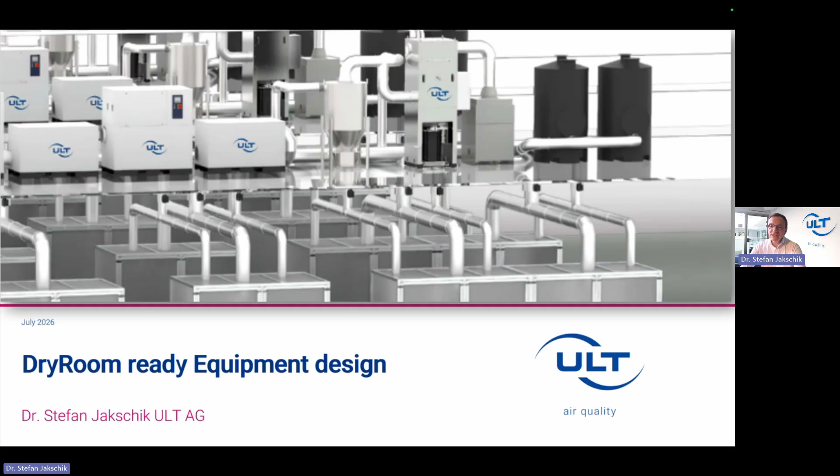You mentioned especially that learning in a scaled-up production and a big volume production is essential for innovations and for further development. So this talk focuses on air, on the environment in battery production, and it also shows how these learning effects should be applied there.

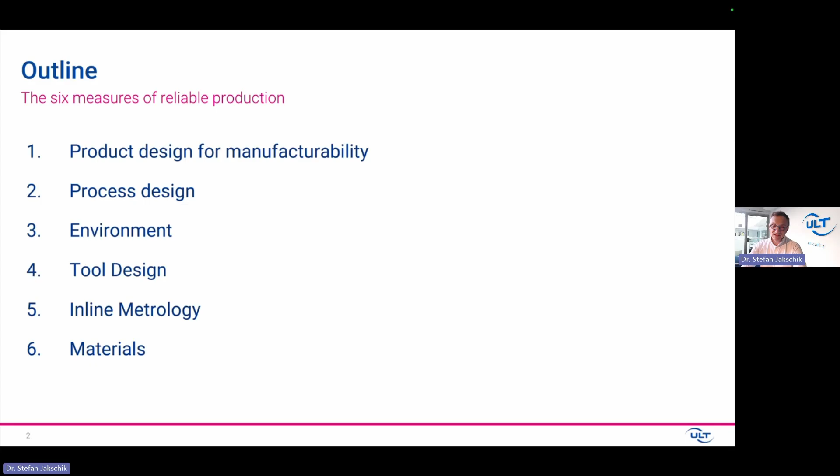We identified 6 measures of a reliable production from our point of view, from environment and air. First thing is product design for manufacturability. Second is process design, then the environment where you do the process, the tool design, some inline metrology topics, and material topics. And at the very end, I will also tell you what makes it the Magnificent 7. But let's walk through these topics first.

Before we start, I'd like to explain what drives us at ULT in the market and in the economy. First, we are focusing on employees' health. If the air is clean, everybody stays healthy. If not, you have the risk of losing work time, workforce. You have long-term effects on health and definitely also on motivation.

Second, you also want to focus on reliable machine operation. If there's too much dust and particles flying around, machines get deteriorated, and you have very high maintenance costs, downtimes, and also rework to be done. And third, also extremely important in battery production, is product quality. Product quality in many processes depends strongly on air and particle-free production.

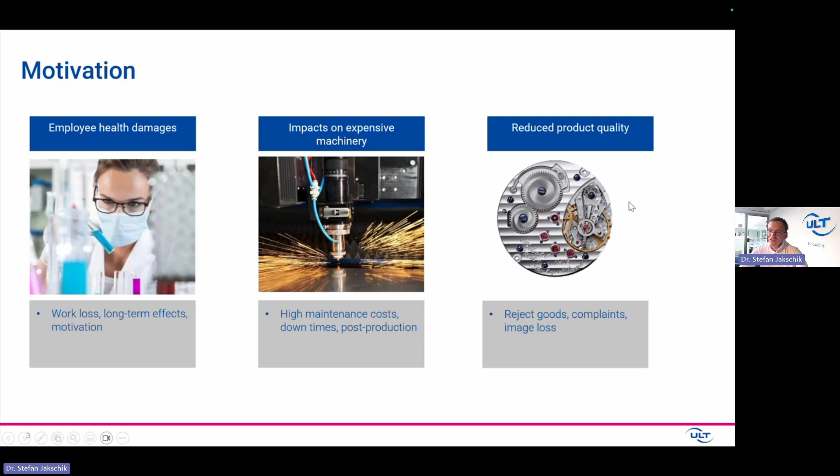I think such a watch production is very intuitive for every one of us, but this is true for many processes. I'm sorry for showing you these very bold pictures here in the beginning with some German words on them, but these are examples of burnt down cars because of particles or moisture in the production processes. This is what Benedict also mentioned in the beginning, that battery production seems to always be a bit too late if you recognize things in the battery, and this is also true for reliability.

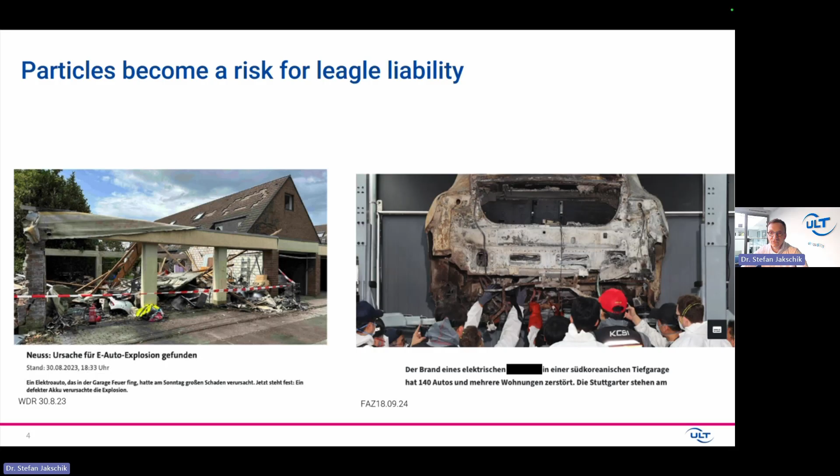If there is a particle during the production process available, sooner or later this very particle could be the cause of a battery short, which leads to thermal runaway and failures like this. I think this makes it so important to learn how to run a reliable production, also in terms of clean air and clean production processes. So this is the motivation for this kind of work we do in this market.

And as promised, first I want to talk about product design.

I see there are many people listening today who have much more experience than me on product design, but I look at it in terms of particles. How do particles impact product design?

These are the three major ways you can make a battery cell: you can make a pouch cell, a prismatic cell, or a cylindrical cell.

Since the pouch cell has a lot of operational steps involved, the risk of particles is highest in pouch cell production. But it's less critical because a pouch cell is not stiff and hard. It can move a little bit, so particles don't necessarily short the cell because it can modify its shape slightly.

The other two, the prismatic and cylindrical cells, are very stiff. They cannot move; all the material is pressed in. So here particles are much more critical.

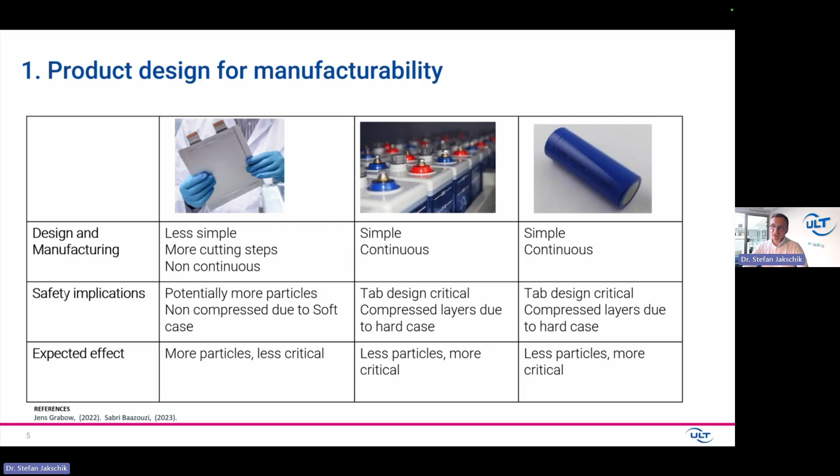The good news is, since the production is less complex than a pouch cell, there are also fewer particles available there, especially for the cylindrical cell, which may have the best process control of that kind of production.

So what are the sources of particles in a battery cell production process? If you walk through it from the very beginning, you start with dosing, then coating, drying, calendering, slitting, drying—all these production steps. I showed you what kind of materials are exposed there and could deteriorate the cell.

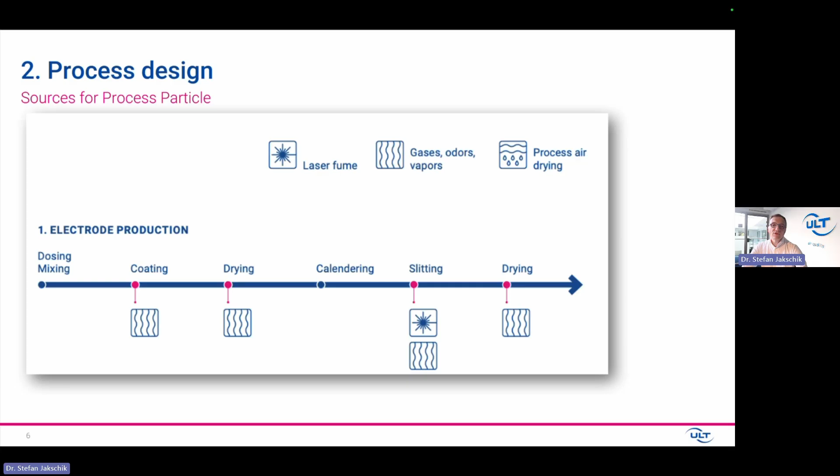In the coating, drying, slitting, and other drying processes, there are gases available—odors and vapors—which could modify the cell. Slitting is in some cases done by laser, and the laser produces very small particles. I have some pictures of these later on, particles which need to be taken care of during production.

Moving on to separation, stacking, packing, and filling, you have the same kind of critical steps. Separating is nowadays done by a knife or laser. Especially laser produces very fine particles, and you have to be aware of moisture in these steps.

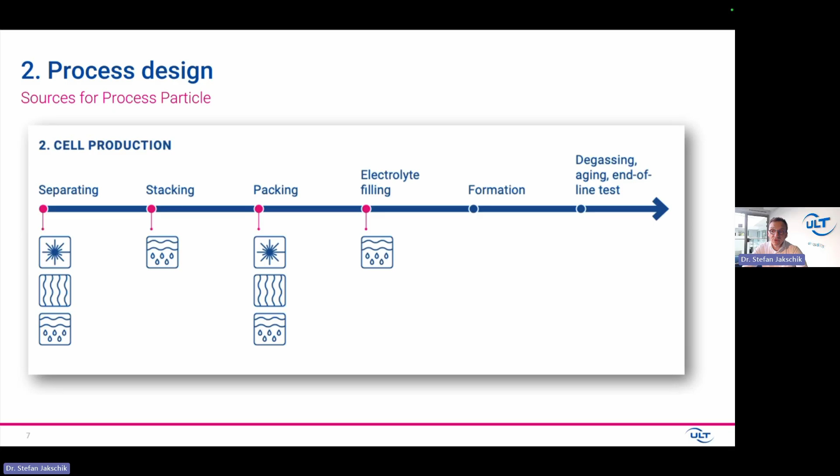The closer you get to electrolyte filling, the more important moisture becomes in the production process. From our point of view, water or humidity is also a critical particle or critical gas in the air which needs to be removed for battery production.

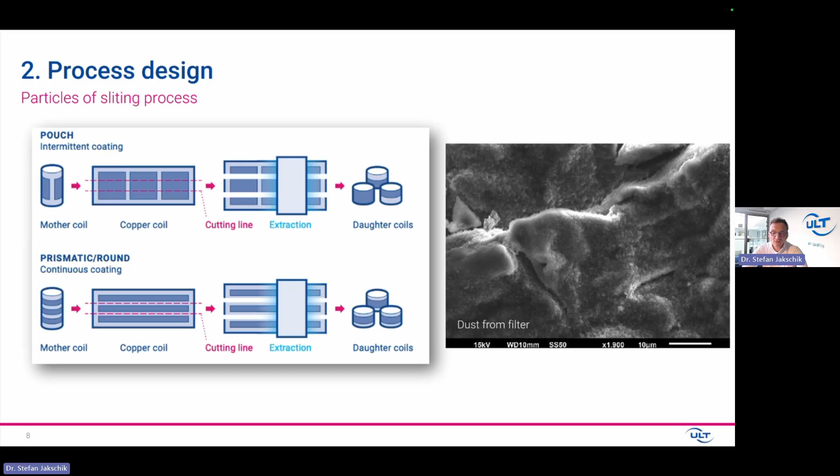This laser process we just looked at takes place like this—very often you have scanner processes running over the electrode. When we look at the particles, you see something like this, especially when you work with a short pulse laser.

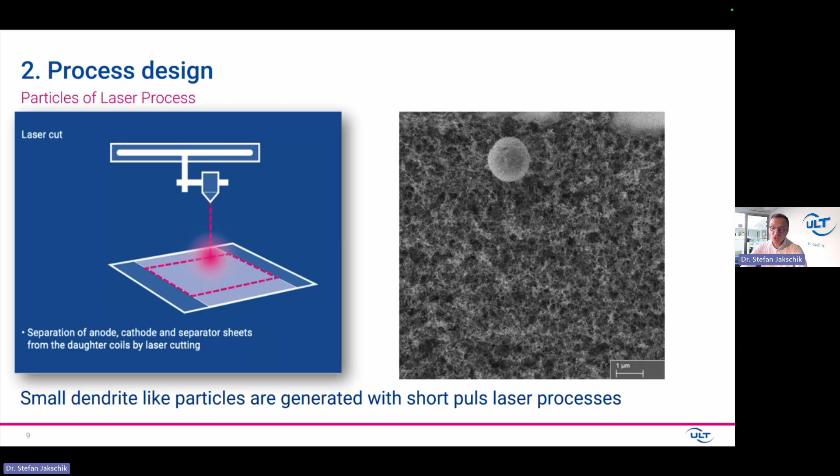You have some balls, but mainly it's kind of woven, very dendrite-like particles, as you see here. For those of you aware of batteries, dendrites are often lithium dendrites, but these are dendrite-like particles from the laser slitting process, which could be on the electrode surface after this production process.

Further on, when you put everything together in the pouch, you have a tab welding process. In my experience, this is the most underestimated process because very often it's done by ultrasonic welding or laser welding, and many people don't see the particles—I often hear from the market that there are no particles at that step. This is not true.

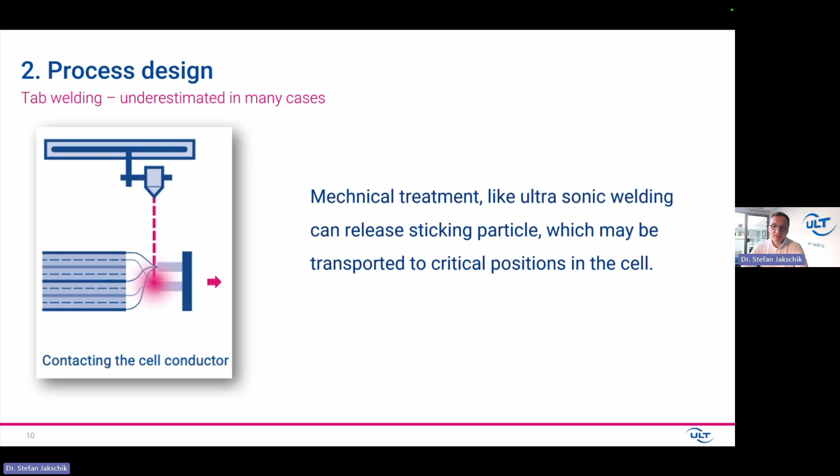When we do a particle analysis here, we also see a lot of particles—especially since you also move particles from previous production steps and bring them to very critical positions in the stack or in the cell.

I want to walk you a little deeper into the kind of particles that can be exposed during laser processing—this is a test we made in one of our labs. You have a laser production on an electrode surface, and we investigated lithium titanate and LFP, which is nowadays the common electrode, and you see the kind of particles we observed there.

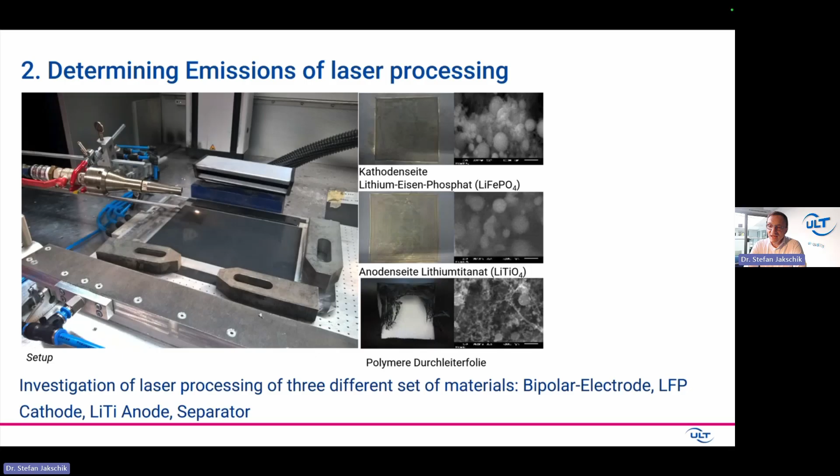A lot of balls, dendrite-like particles. Most of them have a size of 100 nanometers or below—barely visible, definitely not by eyes, and also not recognizable by many sensors and vision techniques. So very good capturing of the particles is extremely important on that side.

Before we come to the capturing, which is machine design, I want to talk about the environment where the production takes place at all. And this is the dry room. All these critical production steps, as I mentioned, close to electrolyte filling, are done in the dry room. And since there is no moisture available, many materials act in a different way.

So you definitely have material degradation. Some degradation takes place because chemical reactions are made possible since the protective moisture layer is missing. So materials wear faster than usual, and also the kind of friction and stress-induced degradation changes. So we also see kind of debris when moving materials over each other, or just by aging effects of this kind of material.

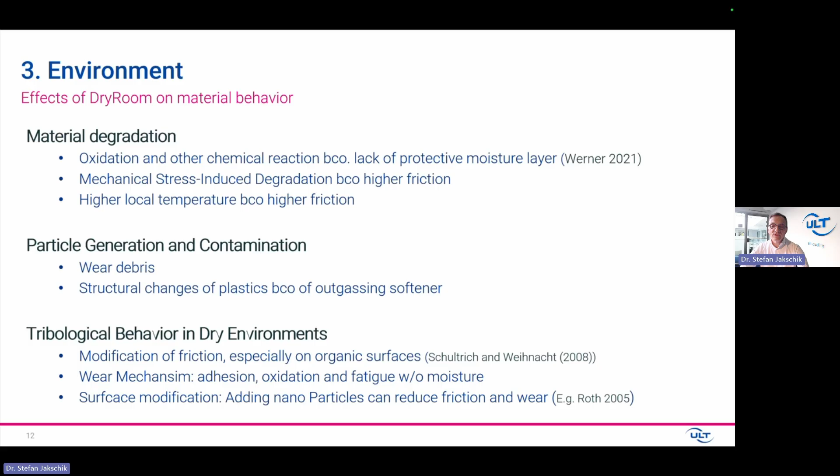A lot of investigations on that one, and also the bad news here is you have the bigger particles which you can see, but this kind of material degradation also produces small particles which are barely visible or detectable. So when selecting the material for a dry room, special attention needs to be taken on what kind of material you use in order to minimize these kind of effects.

So as promised, I'd like to come to the tool design. I mentioned already a few times that a lot of these particles have a very small size. On the left side, you see on the X scale the diameter of the particles, and on the Y scale you see the particle size, and on the X scale you see how long it takes for a particle to sediment.

And it takes very, very long for very small particles, for particles of 100 nanometers, to come to the surface. Essentially, you have them always in the air. A particle of 100 nanometers will stay 14 days, or 13 days here, without any interruption before it comes down to the surface. But in a machine, you always have turbulences, so these small particles are always in the air.

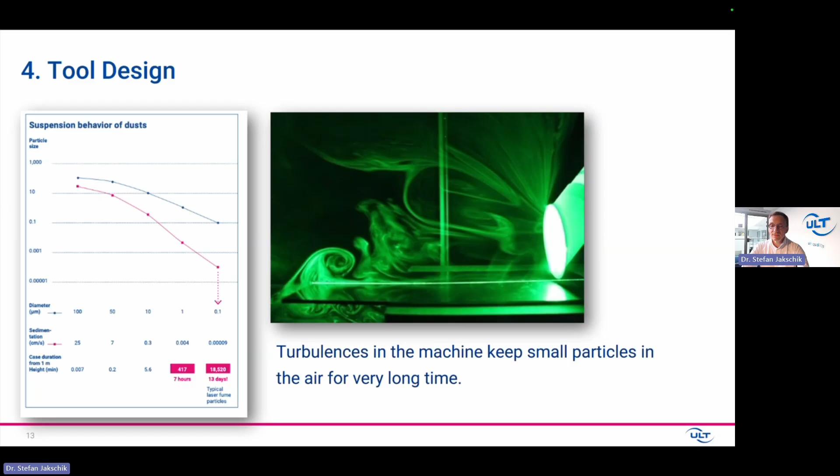So it is very important to suck them into a suction element as fast and as completely as possible. We made some visualization of this process, shown on the right side in green, where we put certain light into the air with a lot of particles in order to see how the particles are captured. But for the machine designers here in the room, I want to talk about two or three very important topics to be taken into account.

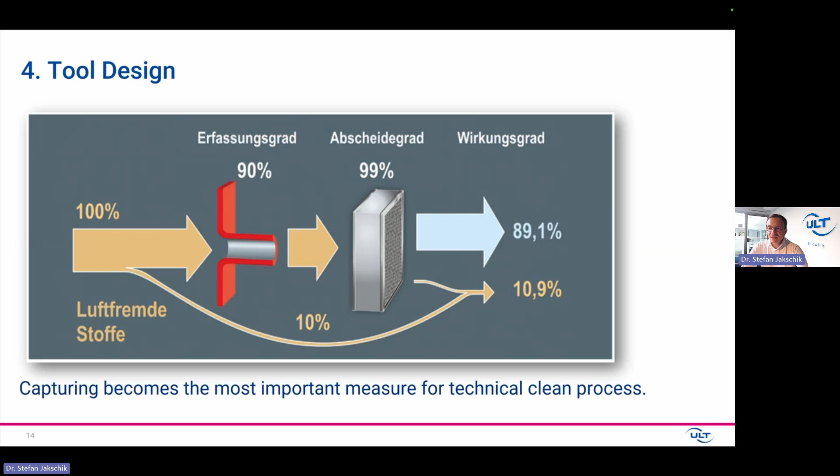The first is you have to make sure that you capture really everything, or nearly everything. So in this picture, you see if you have 100% of the particles and you just capture 90%, you still have more than 10% of particles in the air which could degrade the battery in future operation. And how to do this, how to make proper capturing, that's shown on that slide.

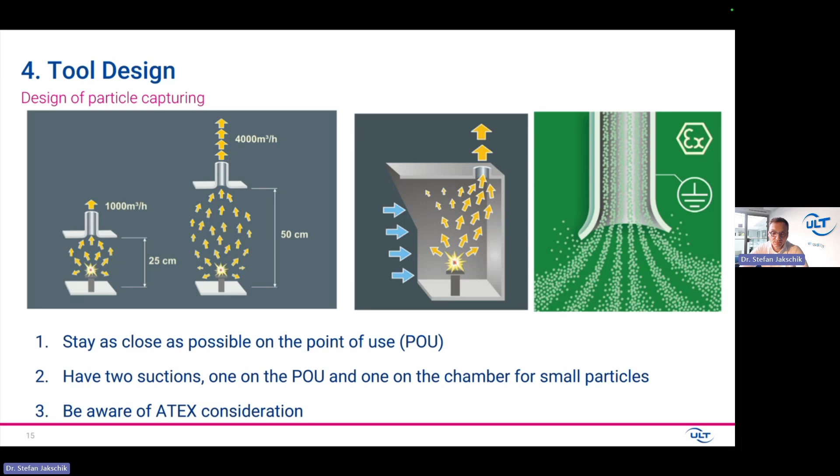So after we did everything we could do, after you have a proper clean room, a good tool design, and good suction, there's still the risk of having particles on the surface. So an inline metrology after these kinds of steps is strongly recommended. An early detection of these particles on your surface could reduce any scrap cost later on, or even reliability topics in the market.

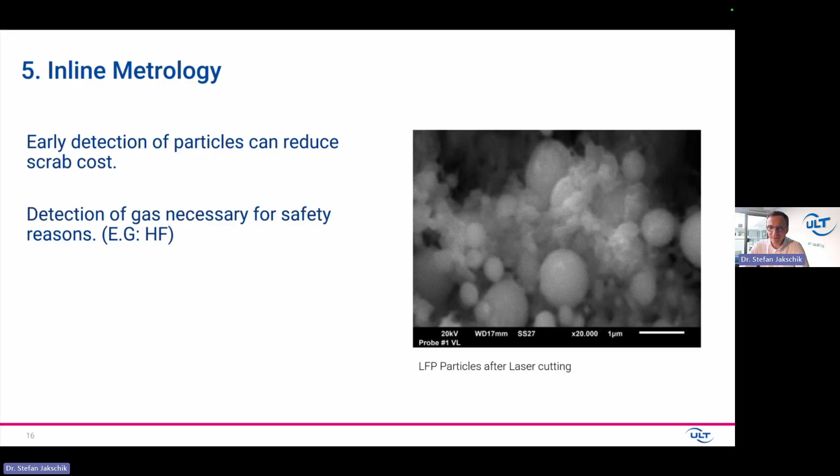In addition, we also strongly recommend detection of gases, because if a laser is operated on a typical LFP electrode, there is some risk that acids are produced like HF, especially if PTFE material is involved. This hydrofluoric acid could be produced. So in our installations we always work with HF detectors and HF filtration.

To make sure that no acid can deteriorate your battery cell, your equipment, or your employees in the worst case. So that's about inline metrology. And finally, I'd like to show you an installation, which is definitely not the biggest one we made, which you need for all of this kind of particles produced during battery cell manufacturing. You see on the right side a cyclone, which takes out the biggest particles, and then comes the filtration unit.

We have a filtration unit modified in a way that it also gets rid of the acids, of the hydrofluoric acid, and in some cases chlorine acid. After the filtration unit, most of the acid and particles is out of the game, and the two black bins on the left side are responsible for all the odors and additional gases in the production flow. So this is a typical industrial machining setup for that kind of process, when you want to make sure you have a perfect filtration where you work.

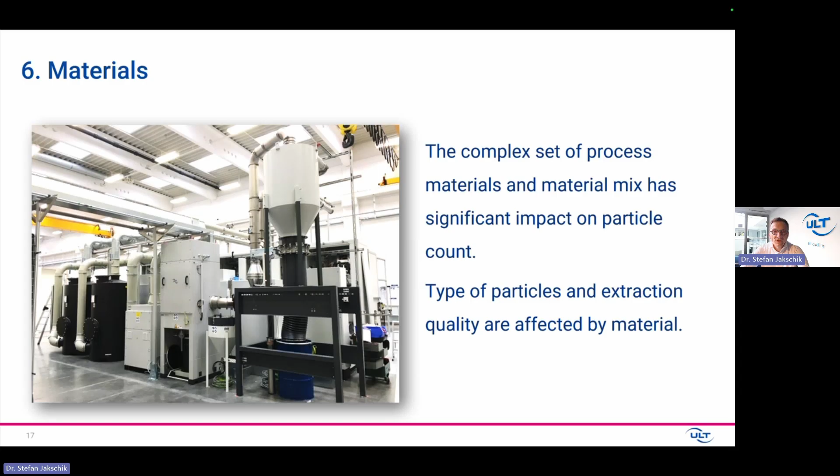With that, I'd like to come to the end. I promised to talk about these 6 levers that need to be taken into account. The first is design for manufacturability. When you think about your process, you should not just think about the specs, but also about how to minimize particle sources and how to design the product so particles don't play such a critical role.

Then comes process design - always think about what kind of steps you need. Some produce more particles, others less. And third, very important in battery manufacturing, is the environment. Clean and dry is a very simple answer there - clean and dry.

I did not talk too much about how to further improve the environment, and this is the picture on the right side which you see here. To our understanding, the most effective way of getting a very good environment is mini environments, where you have a certain housing around your machine or tool, and within that housing you supply the right amount of cleanliness and humidity, but also take care of all the particles produced during that production step.

This is something where ULT especially focuses, and where we have a lot of experience from the market. You see here an example of an installation where we brought everything together - the mini environment, the dehumidification, and all the filtration tools or necessities you need.

Your presentation was referring to the wet electrode production process. Do you see any differentiation in requirements for the dry electrode production process, DBE? So yeah, definitely I talked about the wet production process. You have different coating and you have the drying process to be done afterwards. Many other steps are very comparable. So also when you do a dry production, you have the slitting to be taken into account, and certain humidity and particle topics start earlier in the dry production process. So I would also already right after the calendering take care for good suction and filtration if there are some residual particles left over there.

Okay, thank you. Then we have another question. Are there any limitations for usage of, for example, EPDM or NBR in a dry room environment?

This is maybe a topic that not every one of you will come into contact with. But before I start going into detail on the process itself, I would like to introduce our company for those of you who do not know us.

Hosokawa Alpine is a very traditional company, more than 125 years old nowadays, and we work with approximately 800 employees here in Augsburg and up to 40 additional employees in Leingarten near Heilbronn.

We have two business units. The bigger one, accountable for about 60% of the annual turnover, is powder and particle processing, and I'm heading the R&D department for this business unit. The second business unit is the film extrusion equipment.

So in general, we are equipment manufacturer for all kinds of applications, and we've been part of the Hosokawa Micron Group since 1987.

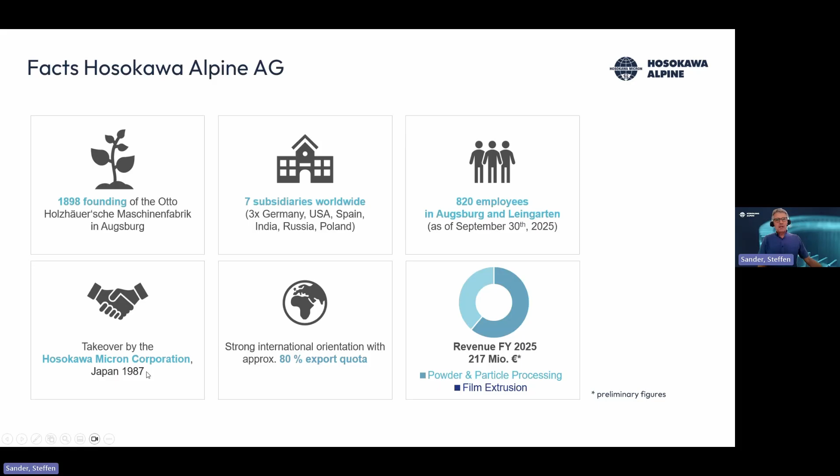The Hosokawa Micron Group itself is a very traditional company. There is still a Hosokawa family who owns most of the shares of the company, and as you can see, we have approximately 2,000 employees worldwide.

Of course, headquarters in Osaka, Japan, but there are some sister companies of ours, and of course our daughter companies spread around the world with a focus in Europe, but also North and South America.

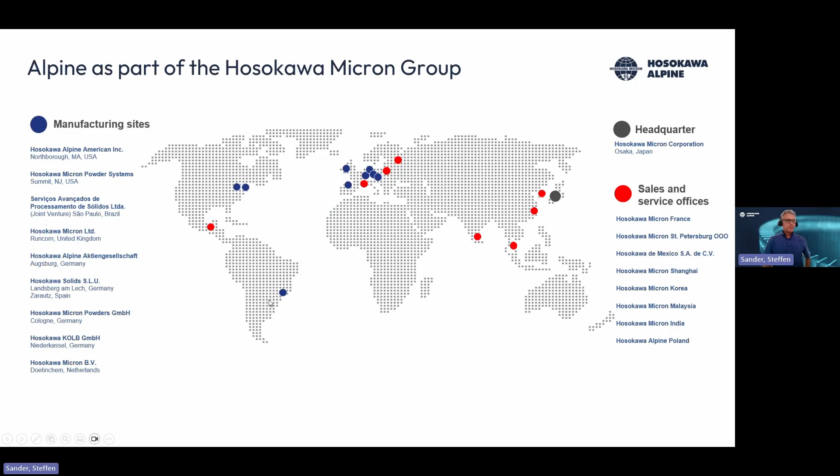We have several activities in the industry or industrial field around lithium-ion batteries, and if you see at this sketch, we are active in manufacturing equipment for our customers who produce mainly raw materials or cathode active materials if it comes to the cathode side.

For the anode side, we provide equipment for grinding and dedusting, but also shaping of graphite, fine grinding of silicon, for instance, and other anode materials.

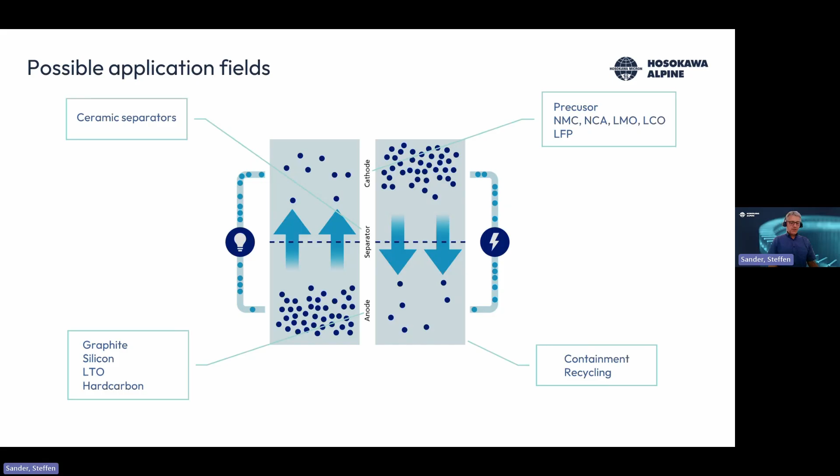Of course, if it comes to ceramic separators, also the raw materials are manufactured using our mills and classifiers. But we are also active in the recycling field and also have solutions as a group for containment and all kinds of equipment for the safe handling of materials that are hazardous in some cases.

What's quite important, I think, if you are talking about production scale for lithium-ion batteries, is that you need to have the ability to look at the complete chain during a scale-up of a process. So we are able to support in the phase of R&D, but also when it comes to pilot scale, we have our own test centers, and we are also able to provide pilot scale machines.

But we also do the design and delivery of complete production plants.

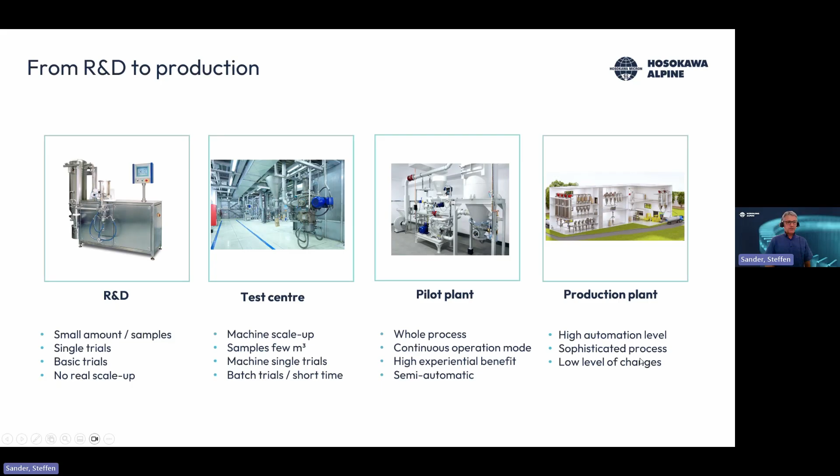What brought us to dealing with the topic of direct recycling in lithium-ion battery manufacturing was the information we got that nowadays the well-optimized processes, when it comes to battery production, produce 7 to 8% of the coated electrodes as scraps during the different steps in the production, and a big portion of these scraps are separated and can be collected and treated separately.

During a startup phase of such a gigafactory, up to 50% of the electrodes that are coated will end up in the scrap.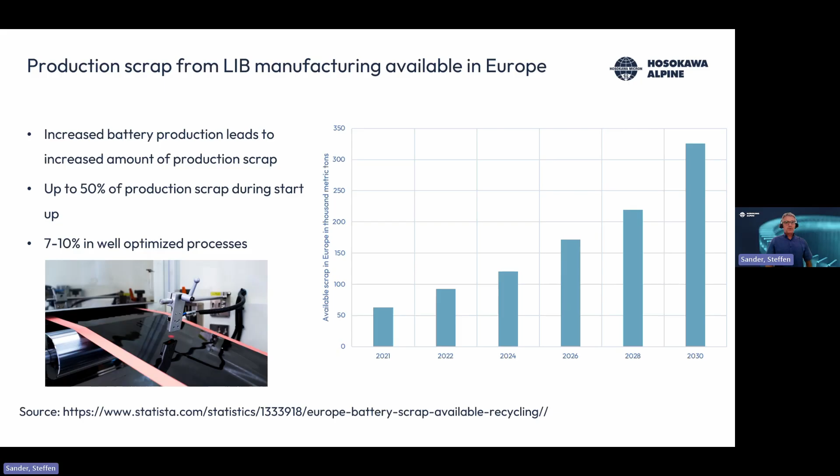So the situation nowadays is that these scraps are sent to recycling plants for end-of-life recycling, where used batteries are recycled. They come into one big pile, a big mixture of all kinds of electrode chemistries, and the black mass that's produced there is a big mixture of anode and cathode material, and also all kinds of additives, but also impurities that come into the black mass during the recycling process. And we thought there might be better ways to do it.

Another important issue here is that due to the regulations for the European battery industry, not only will the recovery targets for end-of-life batteries increase during the next years, but also the minimum amount of recyclate that has to be used in the production of new batteries will increase during the next years. And this is a pretty rapid increase. So I think battery producers, battery manufacturers have to make up their mind how to deal with this.

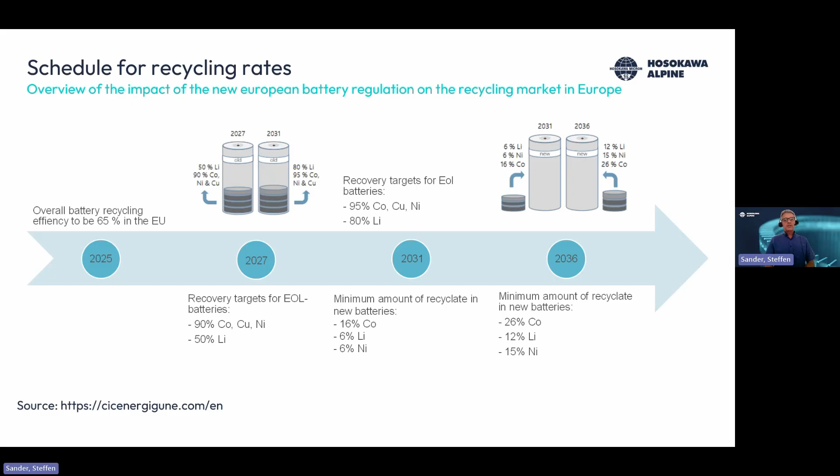So that was, let's say, the initial motivation for us to deal with the topic of direct scrap recycling. We thought there might be a better way than bringing the production scraps to the plants for end-of-life battery recycling, and we are proposing a process like this.

During the electrode manufacturing, there are electrode scraps that can be handled separately, so you exactly know the chemistry of the coating. You know not only the chemistry of the cathode active materials, but also exactly what kinds of additives you use, binders, and all kinds of other additives.

And the problem is that most of these scraps are either on reels or coils, or on the other hand side, you have scrambled up fragments of these scraps. You cannot process these materials using, let's say, industrial techniques so well.

So that's why you first of all have to convert this stream of scraps into a manageable bulk material. And then, of course, you need to gently delaminate the coating from the electrode foil. These electrode foils are very thin metal foils. We think that mainly this would be applicable to cathode electrodes, since the value content is much higher here, but basically that could also be used for anode materials. You have to delaminate the coating from the foil, and then you need to separate the electrode foil.

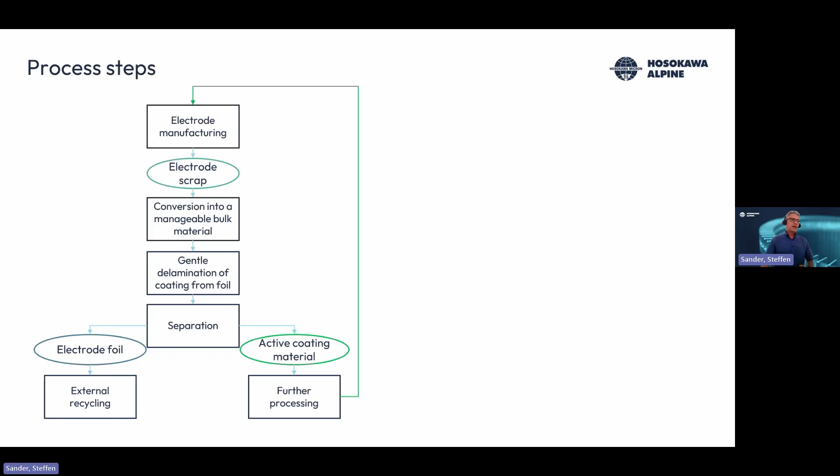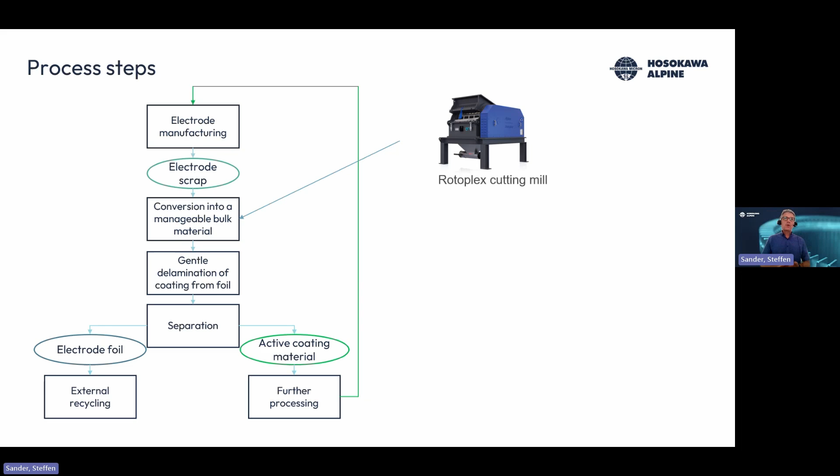For these single process steps, we have different solutions at hand for this conversion into a manageable bulk material of these scraps coming from the production. We could use cutting mills that are specially designed to have a low effect on the electrode foil itself, so low degree of impurities and so on.

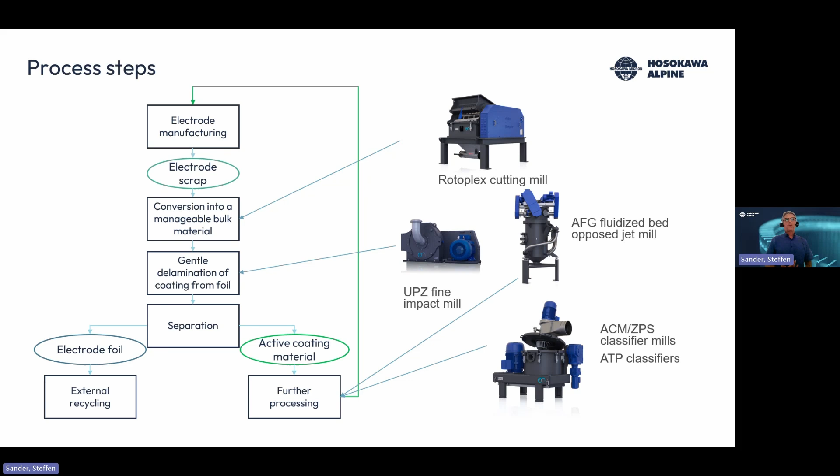For the delamination, there are two different processes I will show you later on: one using an impact fine mill, and the other using a fluidized bed jet mill that is operated in a non-conventional way. Then for the further processing of the material, we have classifying mills available, fluidized bed jet mills - basically the same type of equipment that's used for the production of the virgin materials.

One process route I would like to show you is this one using the fine impact mill. The material that comes here is first of all, as I said, transferred into a bulk material using the cutting mill. You see the material down here that's coming out of such a mill - it's fragments below 1 centimeter, and these fragments are then fed to the fine impact mill. These impact mills are used also in end-of-life recycling.

We've delivered real big mills for these end-of-life recycling processes. But in this process, the process conditions are much gentler compared to end-of-life recycling. So we get stressed material as a result, and here delamination of the material has taken place.

In the next step, we have to separate the electrode foil that still carries some residual coating material, and the fines of this classification step - this is the active coating material. Of course, the binders and additives are still present in this as a mixture.

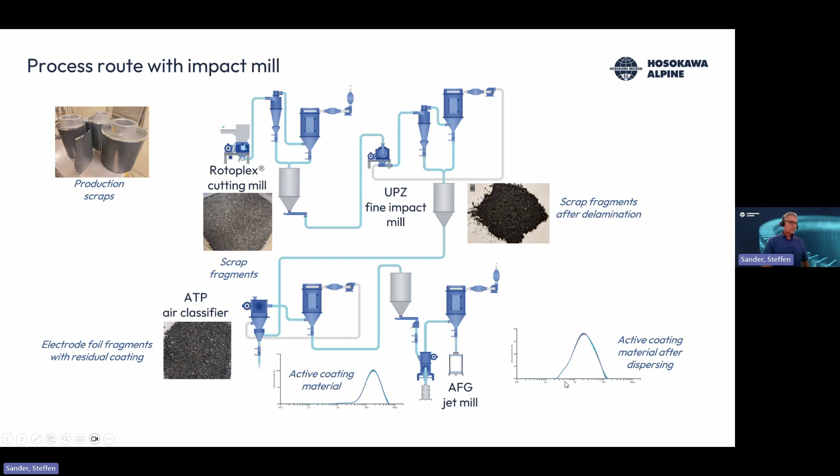But this is something we've learned so far: every material, every scrap is a bit different, behaves a bit differently, and needs some other process conditions in order to get a good yield with low impurities.

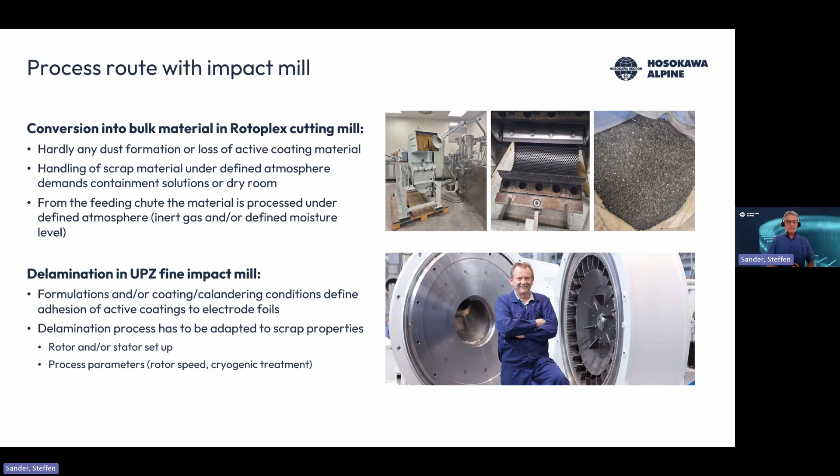Then in the next step, this delamination takes place with a fine impact mill. You can see the size that has been delivered to the end-of-life recycling processes. Here you also have the rotor and stator setup to adapt this process step to your needs, but also the process conditions in terms of the speed of the rotor. You could also improve the results by cryogenic treatment of the scrap material, if this is preferable.

So afterwards, you come up with a mixture of the delaminated electrode foils and fragments, and the fine material that is the active material or coating material.

You need to separate these two fractions, and we use classifiers for this, mostly this deflector wheel classifier. So here you have a deflector wheel rotating with high speed, and you suck in an airstream or gas stream, you can suck the material through. This air volume flow is set into rotation by the classifier wheel, and so you have two different forces acting on the particles.

And for the finer particles, the centrifugal force, the force acting outwards, is lower than the drag force by the gas volume flow. So the fine particles are sucked through the classifier wheel, and the coarse particles are deflected by the wheel. So you have a separation between fine and coarse.

And the fine material, that's actually the coating material that has to be recycled. And as I've shown you, you can further process this material for obtaining the needed particle size distribution here.

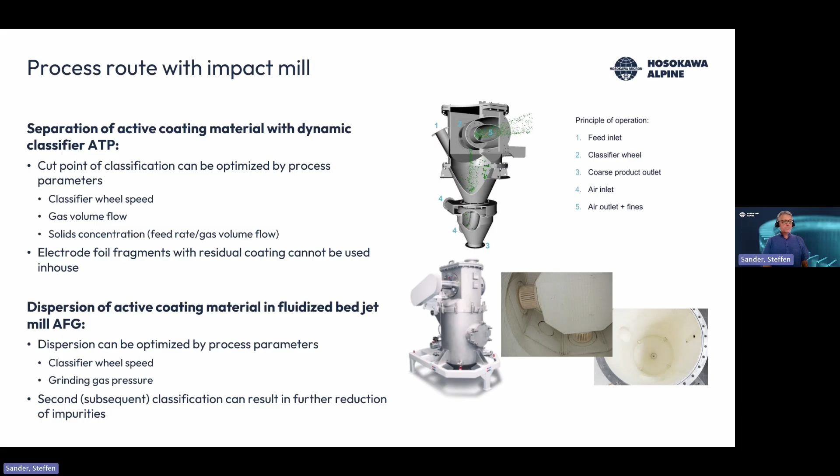We've also shown that there's a bit simpler process feasible by exchanging the combination of the fine impact mill and the classifier with a semi-batch operated fluidized bed jet mill. So you can see the first jet mill here, and again, the fine material, the coating material, is still too coarse to use directly for the recycling material. That's why, of course, a subsequent treatment with a second step is necessary.

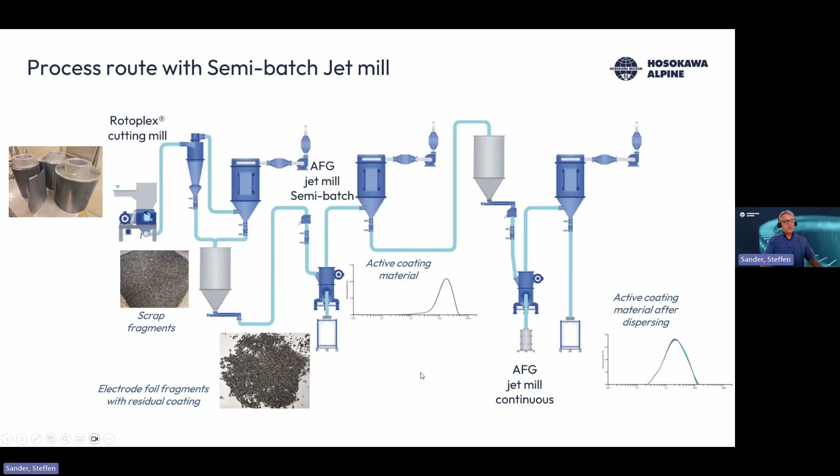Again, you can see the electrode fragments that come directly from the first jet mill have some residual coatings on top, but you have the separation during the delamination in this case. We've seen that the yields are a bit better using this process, and also the tendency to form impurities is lower using this semi-batch mode jet mill here.

You can see how this works. The material comes into the jet mill. In this case, it's not continuously fed, but you feed a material batch, and then you stress the materials using the jets that are usually used for the comminution of the material. During the process, the delaminated material will be discharged through the classifier. The electrode foils with the residual coating are held back inside the mill and sent back to the stressing zone down here.

And after the batch time, you can discharge the electrode fragments from the bottom. So this takes about 5 to 10 minutes, such a batch, and the feeding and also the discharge is done in below 1 minute. So you can adapt the cut point by the classifier wheel rotational speed, and that's why you can very well fine-tune this delamination process here.

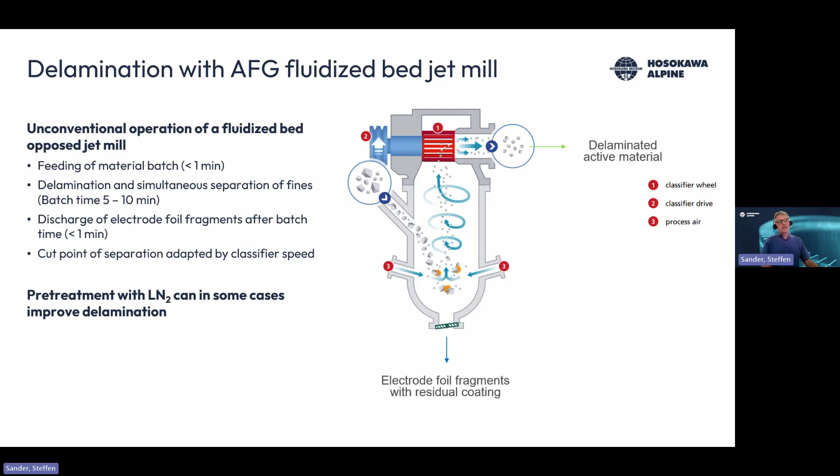We've seen that the pretreatment with liquid nitrogen, like shock freezing of the material, can improve the delamination, but it's not necessarily economical.

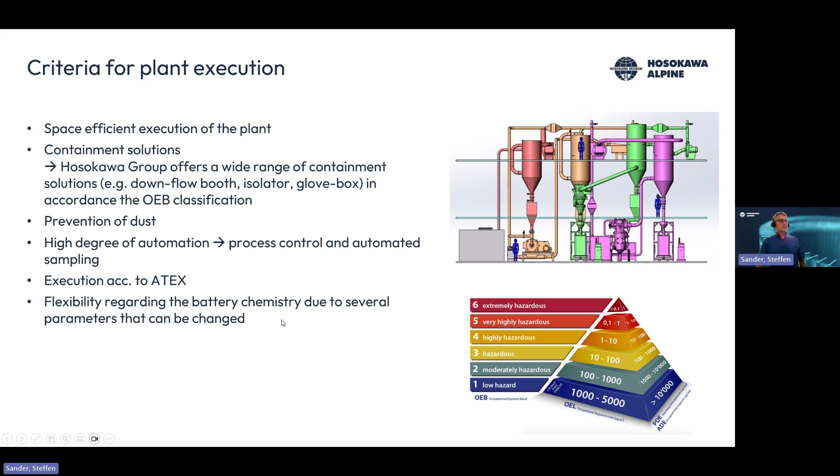By tuning the parameters of the equipment, you can adapt the process to the needs of your material. So to sum up, we've seen that the process must be optimized according to the properties of an electrode scrap. Each scrap behaves differently, needs different parameters in the process in order to obtain good results.

Both process routes I've shown can be adjusted by various process parameters to meet the requirements. And we have a test facility for first tests available, where we are also able to handle hazardous materials such as NMC and other hazardous materials. You see the material, the equipment we have available there, so we can also go through the complete process there.

But the process will be challenged and further developed during a joint project we've just started beginning of this year, and it's called SkArec. It's a funded project, and you see the project partners here. Together with VARTA, Elyte, EurA, and ACP, that's the industrial partners. And together with the IPAT in Braunschweig and Hochschule Aalen, University of Applied Science in Aalen, we are challenging this process and going to further develop it.

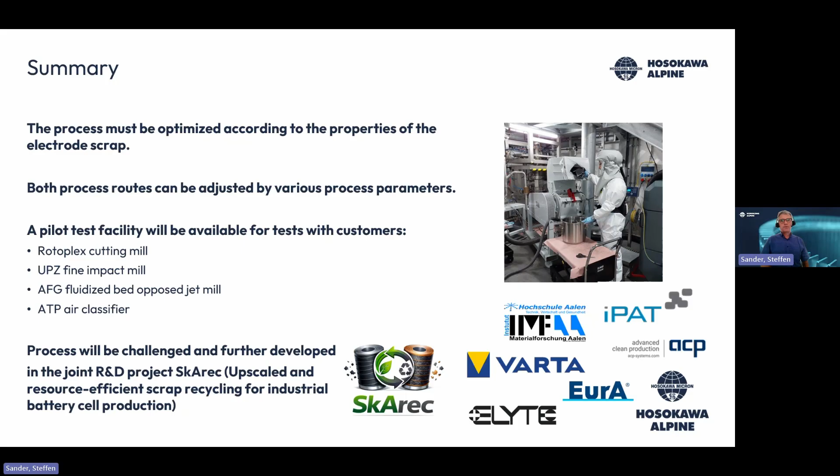That's a question. Of course, this is our focus. We offer, as I said in the beginning, the equipment for size reduction and classification, and of course the complete processes around these core unit operations. We usually work together with customers that have the ability to test the materials afterwards. But we also have a partner on site where this little test installation is, that is also able to make small cells, and does also analysis for testing the materials. But we do not have our own equipment or facilities for doing batteries and things like this.

Okay, thank you. Then we have a question about the recyclate rates. Is direct scrap recycling the answer to the battery directive and its targets for recycled contents?

It's not the sole answer, I'd say, but maybe it could be an aspect to that. I have to say, so far, it's not done on industrial scale. So at the moment, we are talking to several partners, and well, this is also the reason why we've taken part in this joint project, to learn more on the feasibility of using these materials directly. But if this should not be feasible, it must be a big advantage to use well-defined material, also for longer loop recycling as well. But we think it could be one aspect of a circular economy.

Okay, thank you. Then we have another question. The process route shown featured a large number of cyclones and filters where explosive atmospheres are likely to develop. How is safe operation guaranteed, and what explosion protection measures are implemented?

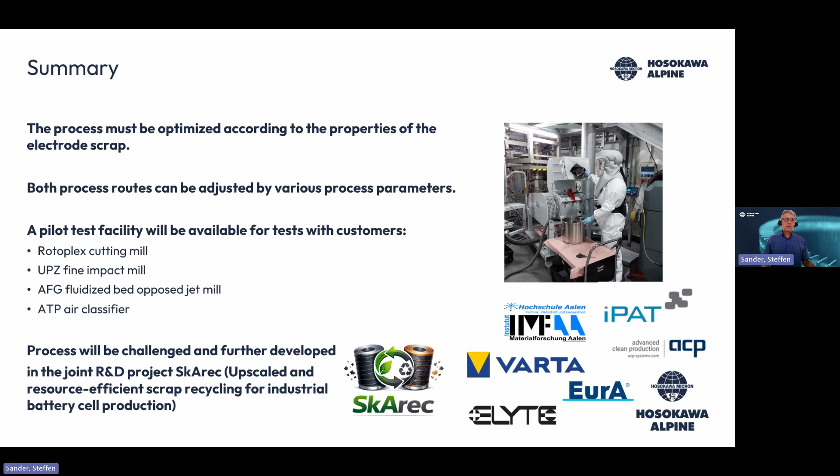So these cutting mills, this is the cutting mill at the test center. That's a rather small one. We have much larger ones, of course. For this kind of throughput, a smaller mill would be sufficient, but of course you need to handle the volume as well. As you can see in this design example, you can use a larger cutting mill in order to be able to handle these voluminous fragments or bales.

From what we've seen, the scraps are usually collected in barrels. So let's say the maximum size of the barrel would also be the maximum size of a feed fragment or feed particle, if you like. There are measures in the feed area of the cutting mills that can be used. We have a lot of experience in in-house recycling for film production, and there you have the same problems with all kinds of forms of these scraps or residues coming into the process. There are measures that can be taken for compressing the material before feeding into the cutting mill, and so on.

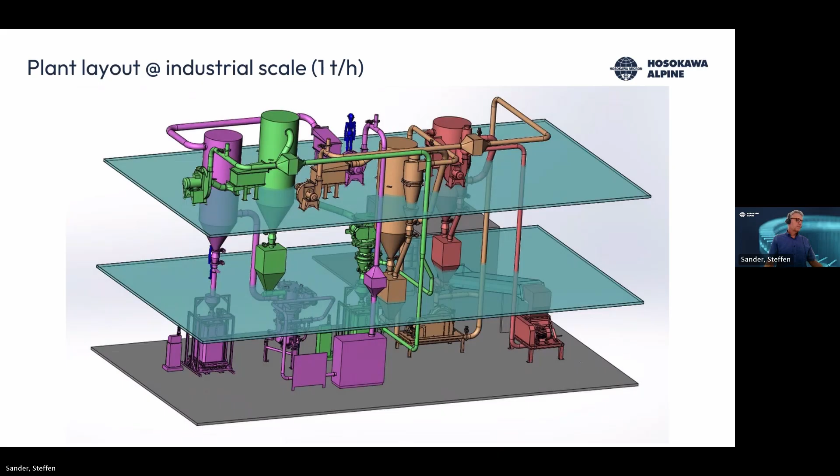Do you have experience in compaction or briquetting processes with the fines produced at each step of the process? Maybe with black mass? What do you think?

Well, we do not only do the grinding or size reduction and classification, but we also have equipment for compaction. To be honest, at the moment we did not do any tests in compacting the fine materials into granules or pellets or things like this. That has not been done so far, but this might be an interesting option if the usage of the material is not done directly on site, but if you have a transport to another site for further processing, then this might be a very interesting option. I'm very confident that this should be feasible. As I said, we also make compactors, and this is a very common way to reduce dust problems and also to reduce, of course, the transport volume of fine particles or powders.